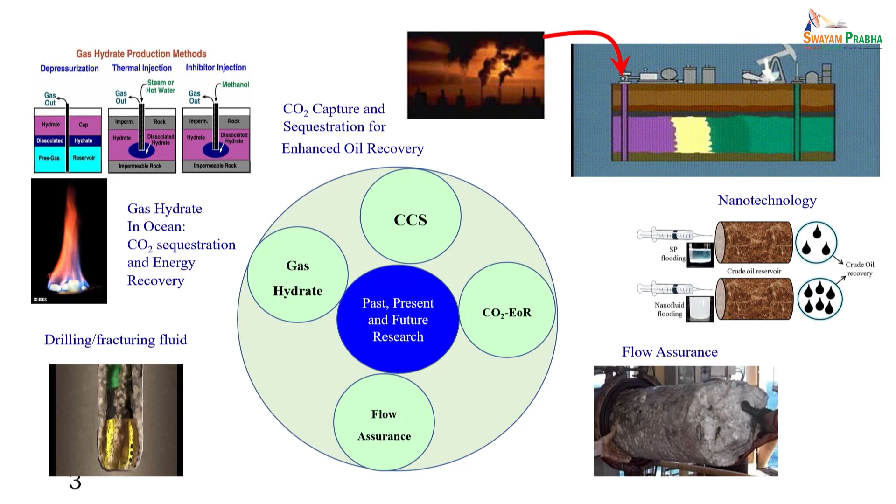Today's talk is primarily focused on properties of carbon dioxide, and then mainly on the capture side, CO2 capture and transportation. There will be talks given by various other faculties which will cover utilization, catalysis, maybe conversion, electrochemistry, etc. So we will have to figure it out, you have to connect the dots, right?

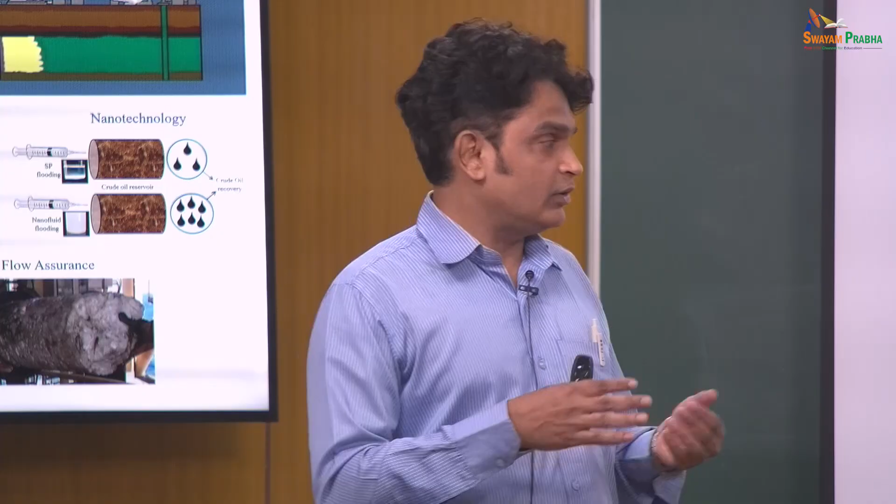So anyway, she has already discussed about these climate issues and how the temperature is increasing. We have been closely around 420 ppm or so, and we have been releasing about 36 gigatons of carbon dioxide into the atmosphere every year, and it is increasing day by day. Why is it important? Even if you talk about 420 ppm, the question is whether it really matters. It's like out of 1 million balls, we have 420 balls. So do I really worry about it?

It is indeed. There have been certain lab scale experiments showing that small amounts of CO2 can be responsible for generating or increasing the temperature. If you make sure all the conditions mimic the atmosphere, the temperature will rise. For example, if I sit in a car, close the door, and come back after a while, you can feel that the car is hot, you cannot really stay inside. This is a greenhouse gas effect, so we have to really worry about it.

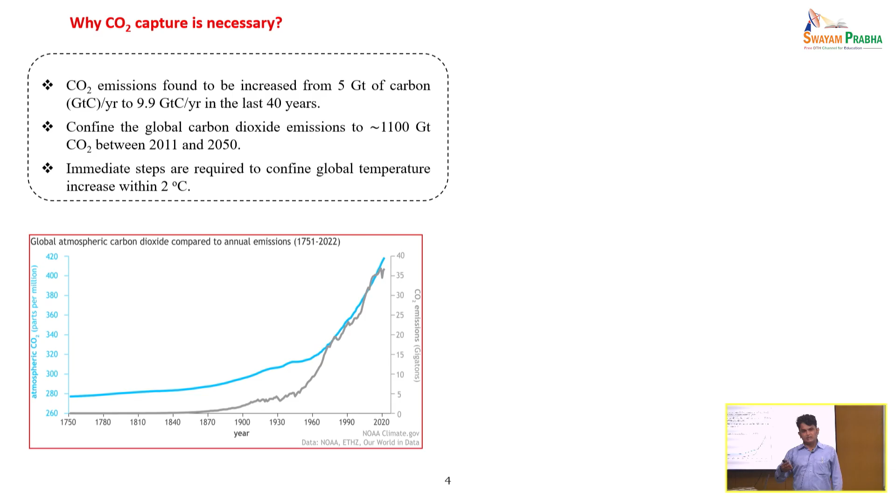And of course, if you look at the data over past several years, there is a rise in temperature. It is of course because of CO2, and there are various other factors too, but one factor is carbon dioxide emission, right?

Now how can we go for net zero? Of course renewables is something we have to consider. But can we really go for renewables? Can we really take care of all our energy requirements from wind, solar, or so? No, it's not possible, because today about 82% of our energy mix is coming from fossil fuels all over the world. Looking at growing economies like India and China, we are primarily dependent upon fossil fuel, including coal, oil, and gas.

If you go out of the campus, you will find several thousands of cars and automobiles running, including two-wheelers, and all use oil, petrol. If there is a bandh or strike by petrol pumps, I think there will be a mess in the city, all prices will go up. So energy is very important for our living. If you do not get oil, there will be an energy crisis. And if there is an energy crisis, then there will be a food crisis. So all this is connected.

Nowadays, it's not that we get only locally made food available, we cannot survive on one thing. So energy is very important for our living, and our energy requirement is increasing day by day.

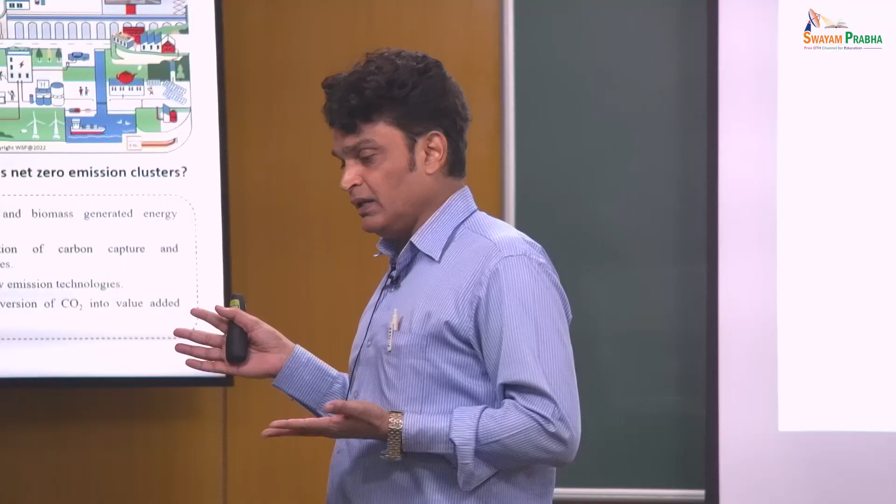I joined in 2010 in the IIT Madras campus, and I saw that there were very few cars, even as an assistant professor when I joined, I did not have a car. I got one in 2021 or 22. I was happy riding my cycle.

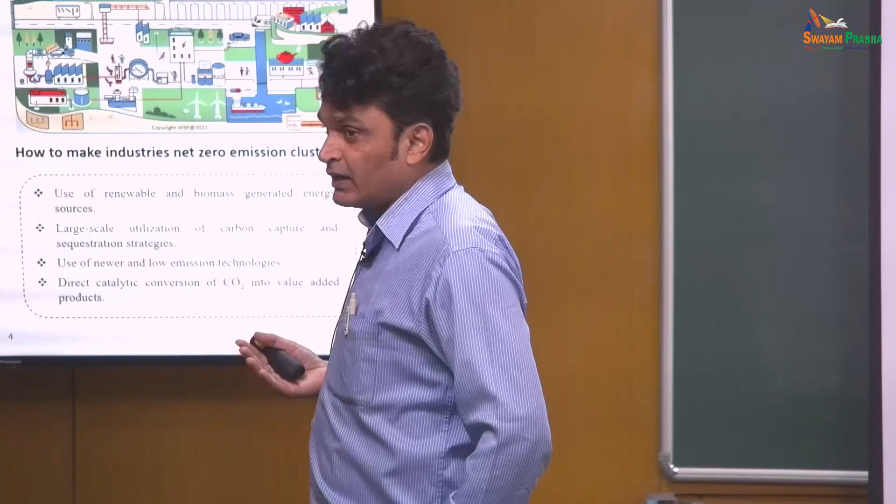It's okay, I am living on a campus, why should I need a car? My children were studying in Kendriya Vidyalaya, going on two-wheelers, so I did not have a car, to be honest. It is not that I was not able to buy it. But today, any assistant professor who joins the campus comes with not one car, but two cars, because his wife is also working, he is also working, so both of them have a car. So you can see the difference, right?

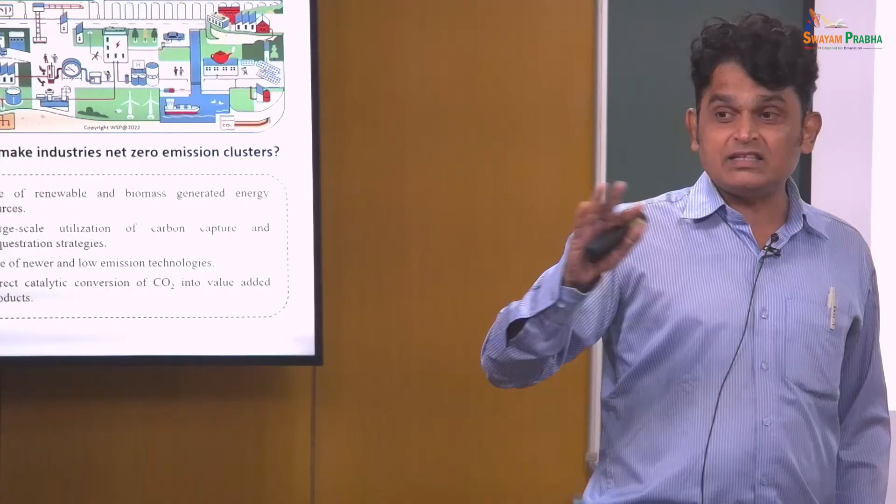All the classrooms are becoming air conditioned, right? That energy is not coming from somewhere, it's coming from electricity, and electricity is ultimately coming from fossil fuel. So we have to understand that our energy requirement is increasing. Just look at everything, a dishwasher, all kinds of electric equipment, and that requires energy. So energy is very important, right?

So in a short time, or at least 3 to 4 decades, I do not see that we are going away from fossil fuels. It's not going to happen like magic, that suddenly after 2 years we will have something completely coming from renewable energies. There have been certain studies which show that even for 50 to 60 years fossil fuel will dominate the energy basket. The international energy agencies say that. Anyway, I am not really going into detail about that.

So what is pollution? We talk about man-made pollution. We have solid land pollution, everybody is aware of this. We have liquid water pollution that affects our rivers and everything, and we have air pollution. These are the 3 major forms of pollution.

Now what is the difference between these? If I go back and see, I can easily segregate solid material from the land. I have plastics, I can segregate that easily, even hand pick that. It's easy for me to separate out from the land. Go with water, the liquid phase, molecules are different. It's slightly challenging for me to separate dyes from the water. So I need a membrane, RO, reverse osmosis, and all kinds of chemical processes that require additional energy.

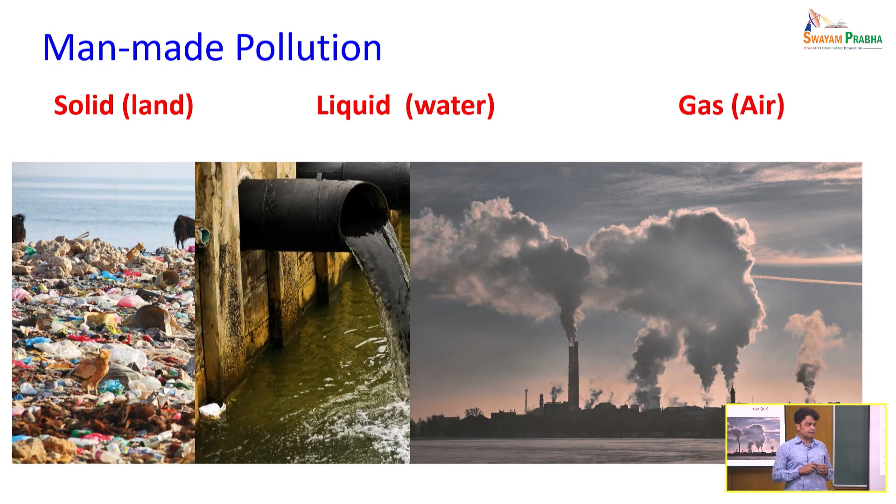Before, right? So you segregate it before you release it into the atmosphere. That is the more challenging aspect of air pollution that we talk about. Of course, air pollution involves particulate matter and many other things that I am not really going into detail about. But as far as CO2 is concerned, we have to ensure that technologies are developed so that before it goes into the atmosphere, we capture it and dump it somewhere.

Now, this CO2 emission is increasing, and as I said, the majority of this energy consumption is responsible, like transportation, energy used in buildings, other industries, etc. And of course, there is agriculture, forestry, and other industries. So energy is a major sector that results in pollution of CO2, carbon dioxide.

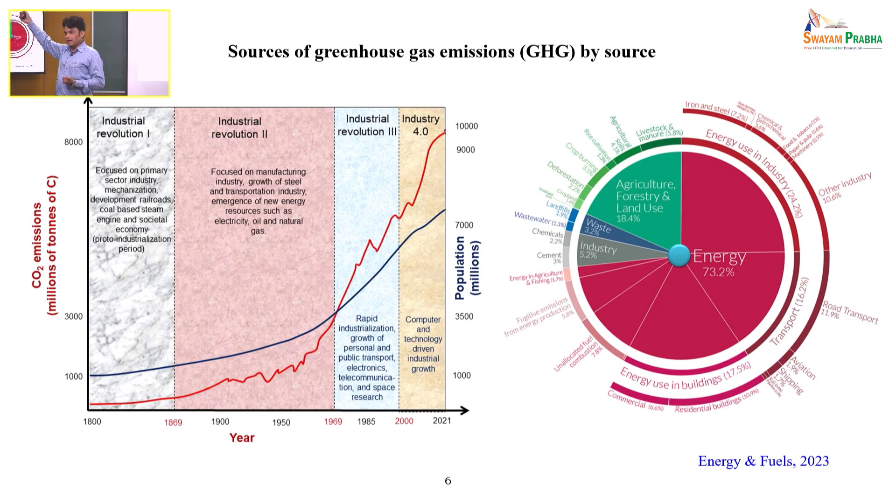Anything, you have a flyover that you can see being built everywhere, right? Ultimately, that results in pollution, because you have to generate cement, steel, and everything. You have cranes running there, everything. So to generate cement, you require a lot of energy, you release CO2, etc. Even generating steel that is required there. So every man-made activity ultimately has a CO2 footprint.

Even the chair that you are sitting in is not net non-CO2 free, right? It has generated a certain amount of CO2 into the atmosphere. So why am I telling you this? We are talking about today a $3 trillion economy. The Prime Minister says we have to go to $10 trillion, $5 trillion, and so on. Every country wants that. Can that happen while saying I am not going to emit CO2 and still have a $10 trillion economy? It's not possible. There have been certain correlations of CO2 emission with economics rather than population.

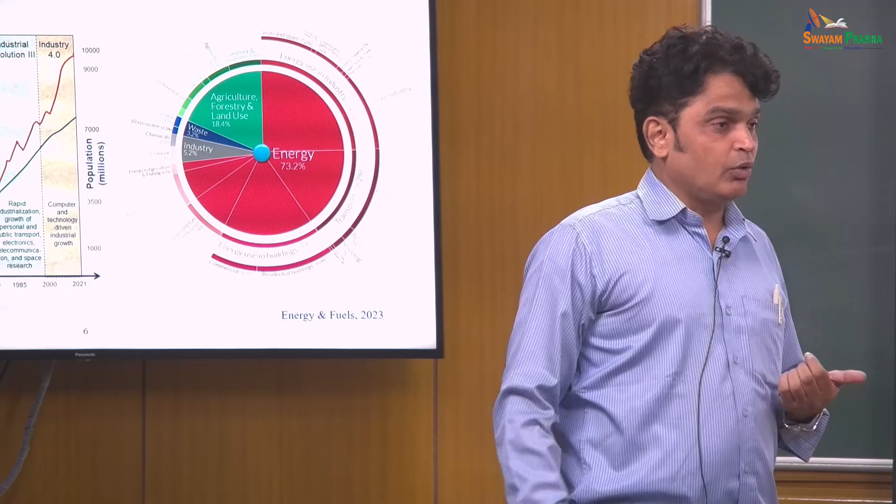The more you want your economy to be higher, you become more of a consumer. You consume and throw, right? So sustainability is an important aspect of this whole game. Anyway, going forward, now the global temperature is rising. I think Madam had already covered that.

Land to global land to ocean temperature anomaly, and it is over somewhere about 1970s, 80s. It is beyond that; it is increasing.

Now there are various scenarios that show, if I capture carbon dioxide, if you do not capture carbon dioxide, how the annual mean global temperature will rise in the next few years. There are certain models - I think Madam will cover that in detail, so I am not going to spend more time on that. But you have to understand that we have to predict the future 20, 30, 40 years down the line in both energy, environment and earth.

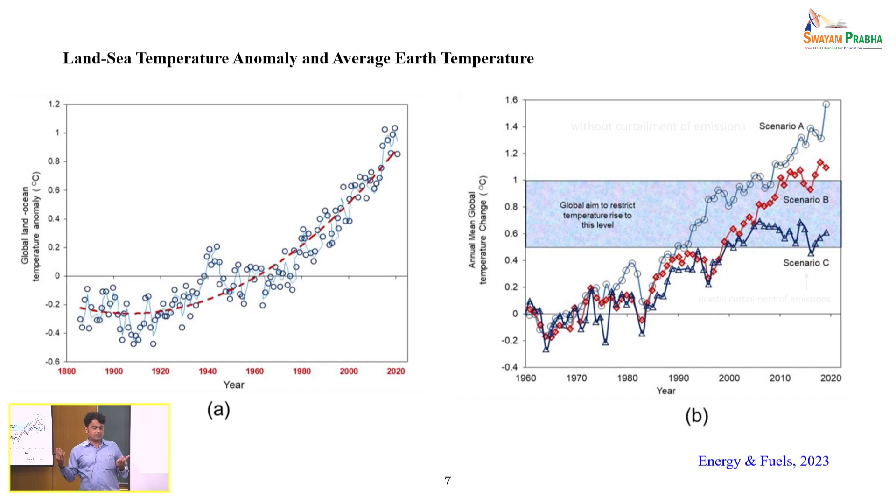If you look at the name of my lab at IIT Madras, I have written 3E lab. It talks about earth, energy and environment. It is a nexus. I cannot say that I do not want energy, but I want less CO2. The more you want energy, you are going to release CO2 into the atmosphere. So you have to dump that into the earth, or you have to take care of your environment. So all these 3 E's are important when you look at overall climate change. All this nexus has to be understood.

So this is an example of coal. In the 1970s, 50s, 40s, you might have seen the steam based transportation through trains. British used to have trains. And then because of pollution, they stopped that - I am not going to run the train because it generates a lot of pollution, I should run it on electricity. Now most of the trains are actually running on electricity.

And this is the data that shows, somewhere from 1950 onwards, the use of coal in transportation has decreased. It's almost negligible now, in 1990s and beyond. I do not see coal.

Earlier, when I was a child, I could go into the market and buy coal. Coal was even used in households for cooking purpose. Kerosene was used in households too. But today if I go into the market, I will not get coal easily. I have to find out, somebody will say you go here and there. Getting coal is not easy right now in the general market.

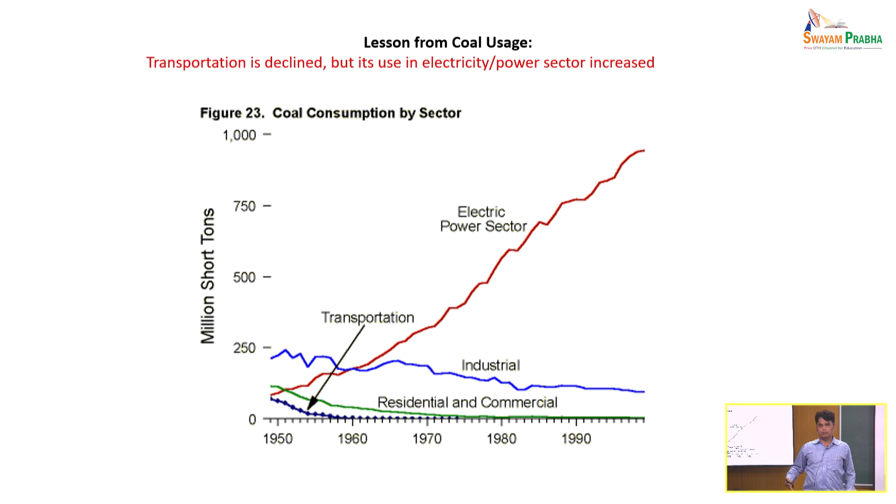But look at coal use in electricity generation - it has increased. So when we cannot see something, does it mean that we are going away from coal? No. Today also, as Madam said, Germany wants to again restart their coal fired power plants. I was reading a couple of weeks back, New Zealand also wants to import fossil fuels. So they have realized that it's not a quick decision to say that I am not going to use fossil fuels.

So even electric vehicles - I am a little critical about electric vehicles, not because they are not clean, of course they are clean, but they only look clean. If you go back and look at the calculations, you will find that they are more difficult for the environment, because we are not improving the electricity requirement - where will the electricity come from? If we really want to generate all electricity from solar energy, then that's fine, but I am not seeing that happen anytime soon.

Even to generate silicon solar cells, there are calculations in the literature which show that they also generate CO2. So nothing is CO2 free, net neutral. Less than 1% of vehicles on the road are electric vehicles - there are about 15 million or so electric vehicles, less than 1% right now.

But given the fact that, okay, I am happy with electric vehicles, does it mean that from this I am going to go away from fossil fuel? I require more energy. Anyway, going forward, let's talk about CO2 in the atmosphere.

Nature has its own way to address the CO2 concern. It has said, okay, whatever CO2 is being emitted, I will capture that. So almost 50% of CO2, it has been said that nature takes care of it on its own, it absorbs it. But because we are growing our economy and burning more fossil fuels, the net CO2 that is going into the atmosphere is increasing gradually every year, and it is getting accumulated.

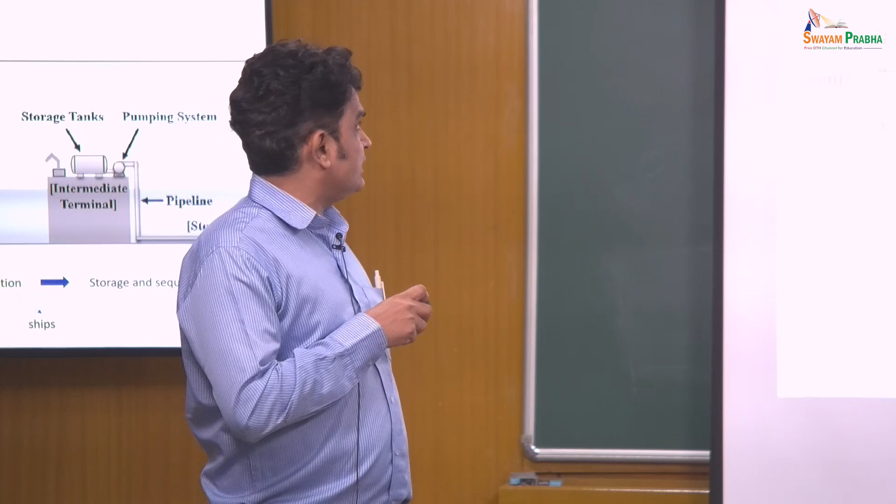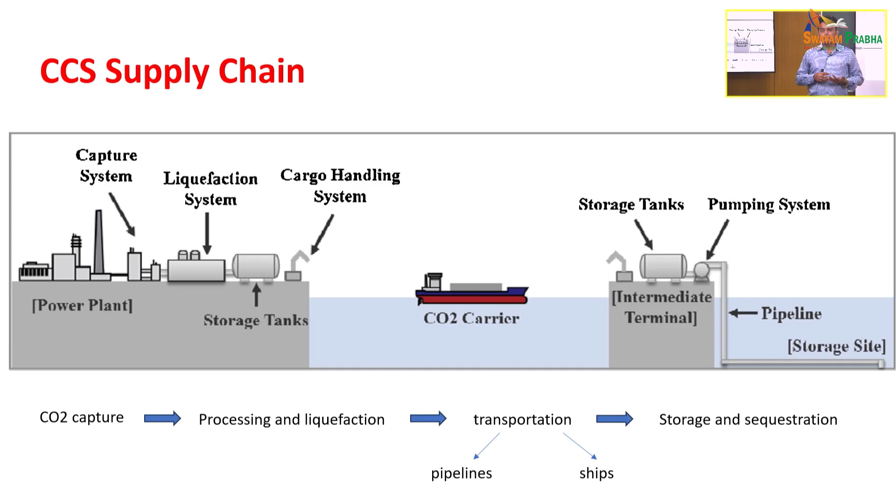transportation and sequestration, and utilization, where you convert CO2 into a value added product like methanol, ethanol, or dimethyl ether. What kind of product can you convert CO2 into? Urea, carbonates, methanol, right? If you understand, most of these conversion processes still require energy. The raw material required, for example methanol or other stuff, requires some kind of hydrogen molecule.

Where will the hydrogen come from? Today 99% of our hydrogen comes from fossil fuel, less than 1% comes from the so-called green way - less than 1%. This is from the International Energy Agency report for 2021. So conversion is still a long way to go.

Utilization, unless I could get hydrogen from biomass or from splitting water through solar energy, which is again very tricky. Of course there are technologies available, but these are not something that can be looked at at large scale. I cannot generate and say I have all hydrogen coming from solar power plants by splitting water. I can do that experiment in the lab, but it's still a long way to go.

So what is a quick way to act? I am not criticizing any technology here - I am saying I do not have time, I want some quick decision. So the quick decision is that I have to dump it somewhere - dump it in sea or onshore. No, I will tell you it's not that simple, but it's at least more favorable in ocean or onshore. Scientifically it is proven. Anyway, we will discuss that.

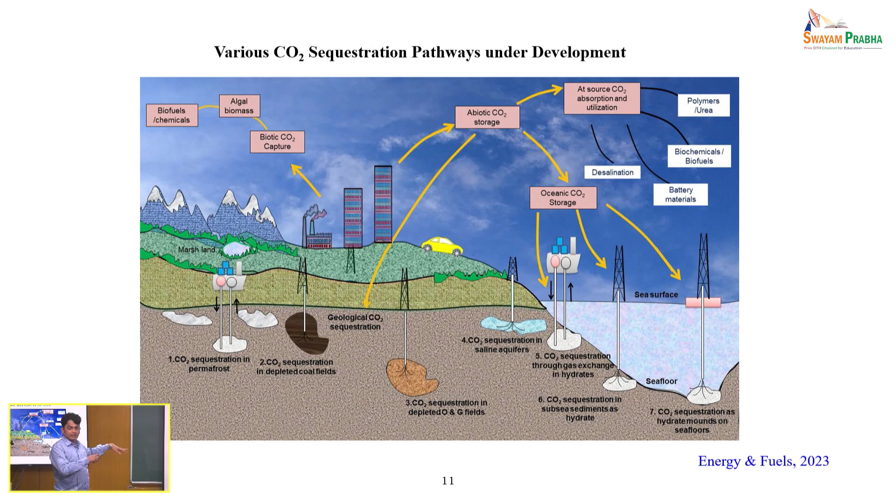The other potential region is the sea floor, where you can sequester CO2 in the form of solid hydrates or below the seabed - I will discuss that in one of the next classes, not the focus of today's discussion. Madam will partly cover aquifers, EOR, etc. We have worked on that, but I think Madam will be best to discuss all these details. Anyway, so this is the ocean storage.

In the ocean you can sequester in different ways. You can do a CO2 plume sinking. You can have disposal of CO2 in the form of carbonates, because CO2 can convert into carbonates. You can actually have CO2 liquid pools in offshore conditions - liquid pools, CO2 will form liquid conditions in those conditions.

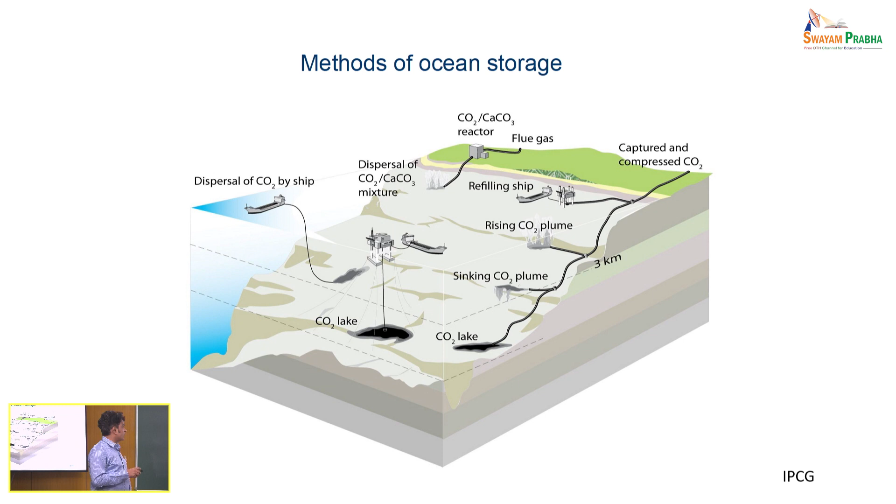I will discuss that in detail in next class when I teach that - how CO2 can form a liquid in the ocean and why it is safe. Anyway, so this is the general CO2 storage mechanism: you have flue gas, a CO2/CaCO3 reactor, captured carbon dioxide compressed, and then you can transport that through pipeline, ships, risers, etc.

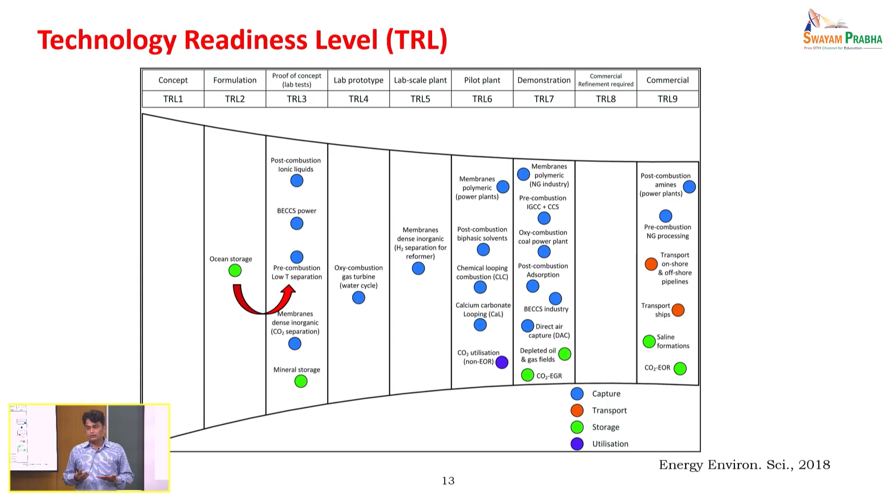Anyway, so why this major focus on CO2 capture? Because anything you want to segregate from air or flue gas, you have to capture carbon dioxide first. So there is one way to capture CO2 from flue gas, or another way is to capture CO2 from air. As I said, about 420 ppm, very small amount, very difficult - I do not know where the CO2 is lying here in the room. Challenging task. That is called direct air capture, DAC.

People are also looking at direct air capture technologies. There are plants available commercially, but they are still not really being looked at in a major expansion. But slowly it is expanding because government has to do that.

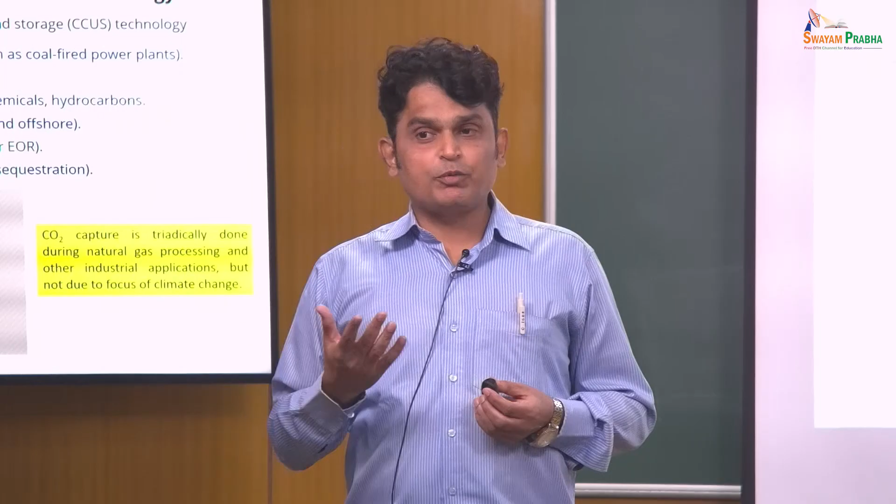Now this is a junk that we produce - it is not something where you have to see that I am segregating my waste and I am not generating anything out of it. I have to pay still to the corporation - I pay some money, they charge me a tax or something like that. So we pay for segregation. Similarly, as a human being, in order to ensure that we are actually in a safe environment, we have to pay for that - there will be a penalty that comes in terms of money.

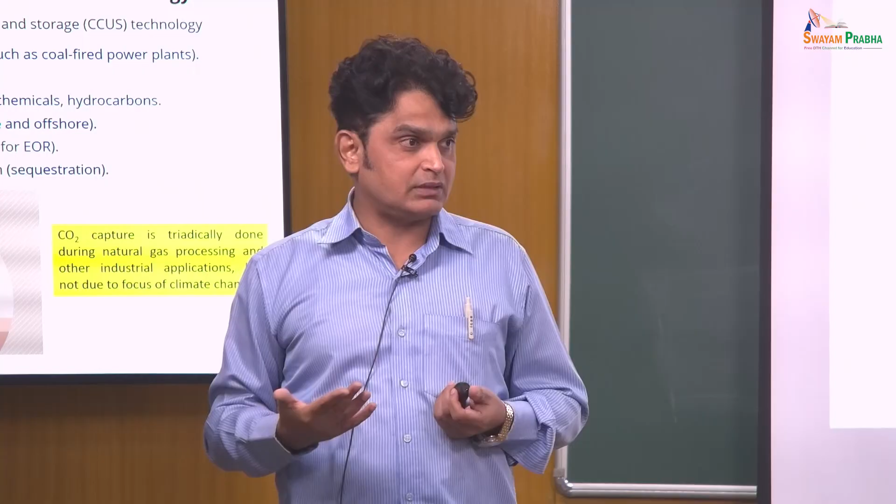Technologies are looking at how to reduce this cost of capture, transportation, and sequestration. So in the last few years, that cost has also slightly come down, looking at development in technologies.

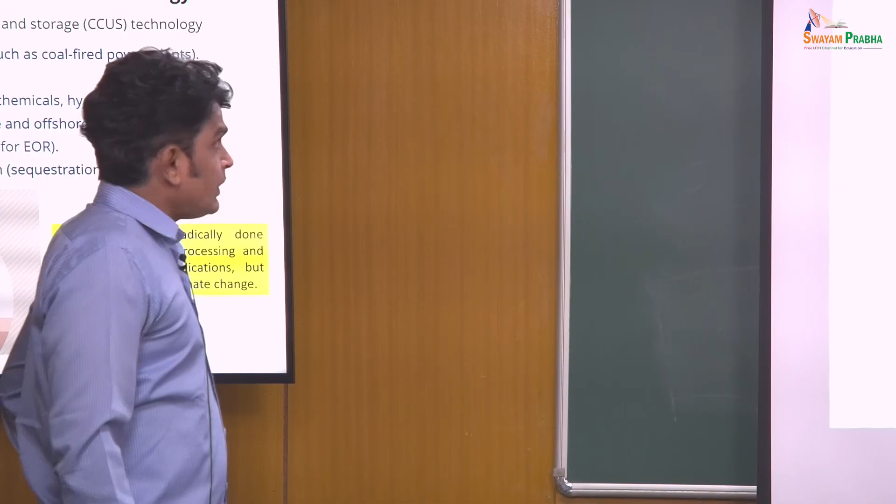So we'll discuss a little bit of the cost aspects. Now CO2 capture, either looking at a stationary plant or point of source like a coal fired power plant, or you can do that from direct air capture. You can convert that CO2 as a feedstock for petrochemicals and hydrocarbons. Again, challenging, as I said, it takes time.

You have to transport that from the power source to the storage sites, either onshore or offshore by pipelines, and you have to inject that into the underground for enhanced oil recovery or depleted oil and gas fields, etc., or you can do that in the ocean.

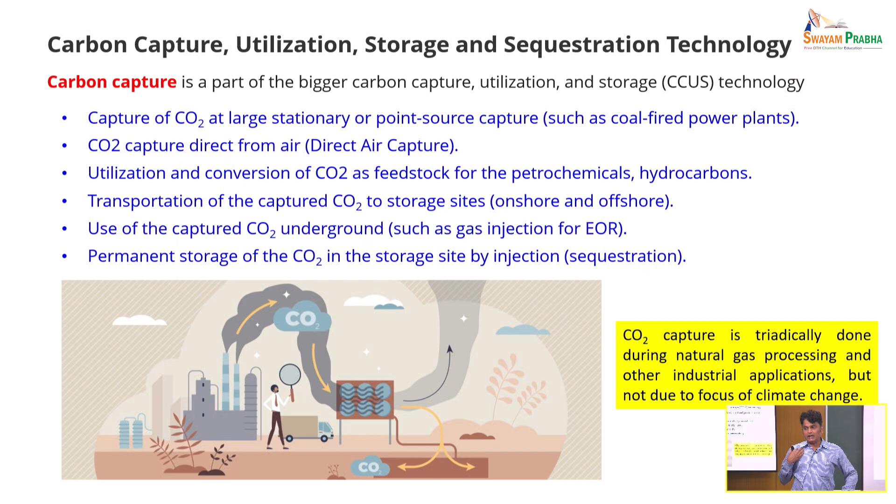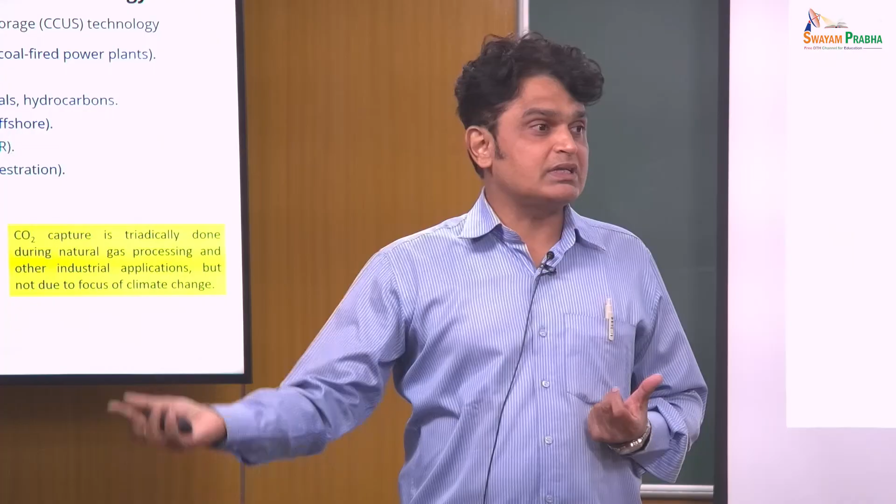CO2 capture is traditionally done in natural gas processing and other industrial applications. It's been there earlier, it's not something that started recently. The natural gas industry has been doing it for a long time, but they were not focused on climate issues. So the technologies were available for specific applications. Now similar technologies are being expanded, and new technologies are also coming up to take care of CO2 from flue gases, power plants and other industrial activities where CO2 can be captured and stored.

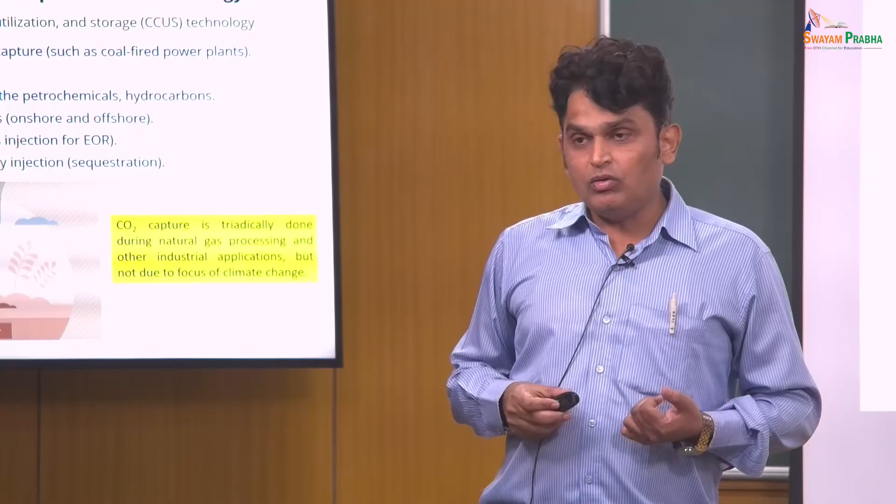Now this requires significant strategic decisions. Why? Because one has to understand that you require to develop CCS corridors where I can capture CO2, transfer that to the pipeline, sequester it into the formations, or use it in industrial applications. So CCS corridors have to be developed by different countries so that this overall process can be made very efficient.

So anyway, what is important about carbon dioxide? Now if you look at this carbon dioxide phase diagram, everybody understands the phase diagram, simple stuff. Carbon dioxide remains gas in this zone, this is a liquid, and this is a supercritical fluid. The temperature is about 300 degrees Kelvin, which is the critical temperature, and about 100 bar, which is about 1500 psi or 100 atmosphere, or 10 megapascal, which is the critical pressure for carbon dioxide. Any pressure above 1000 psi, any temperature above that, it becomes supercritical.

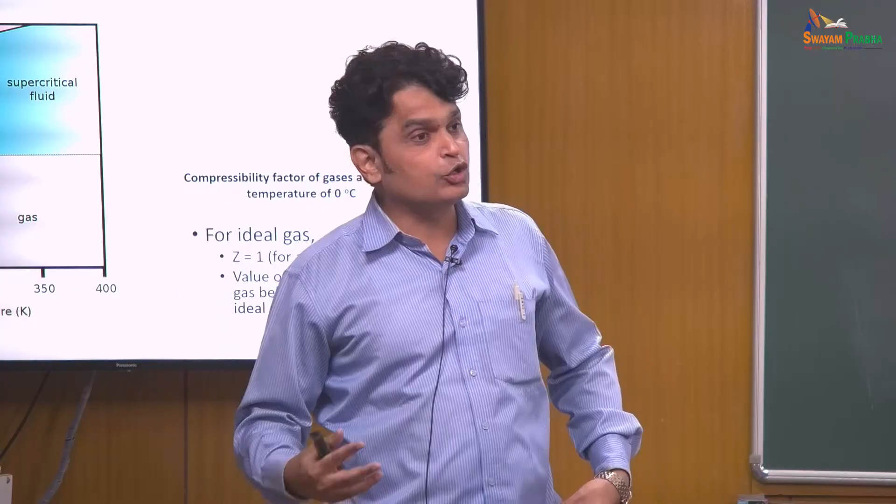Why is it important? Because we should talk about onshore underground storage. Most of the temperature in the reservoir falls in this zone. So CO2, once it goes into the reservoir underground onshore, it becomes supercritical. Supercritical CO2 has different properties, it's not the same property as a gas, so you have to understand that aspect. Supercritical CO2 will have interaction with different reservoirs like sandstone, shale, etc., or basalt formations.

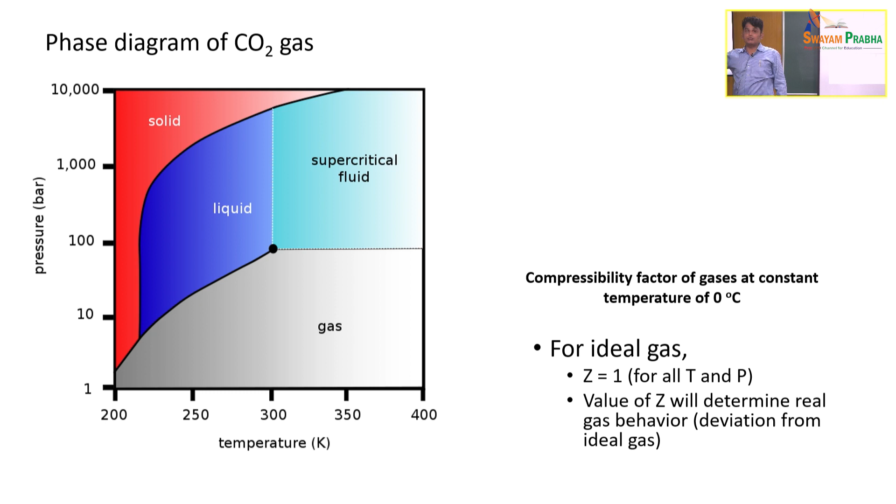If you look at CO2 into the ocean, if I want to inject that into the ocean, the CO2 at certain depth will become a liquid. Ocean temperature is somewhere about this condition, close to 4 degrees centigrade, and the pressure beyond a certain point, 5 megapascal and beyond, it becomes a liquid. So if I want to dump CO2 into the ocean, it becomes liquid at those conditions. Anyway, we will discuss that in detail later on. But this is a very important figure which tells you the different properties of phases like gas, liquid and supercritical fluid as far as CO2 is concerned.

Now everybody knows that any gas is ideal at normal temperature and pressure condition, Z is equal to 1. But as far as CO2 in the atmosphere is concerned, I do not have to worry about it. But when I want to transfer that through a pipeline, either onshore or offshore, the pressure and temperature conditions will not be atmospheric, they will change, and therefore CO2 will not be an ideal gas, it will become a real gas.

Hydrogen, all of them actually have a Z of 1 at normal pressure and temperature conditions, but as pressure increases, the value of Z differs for individual gases. For hydrogen, Z always becomes more than 1 as pressure increases beyond atmospheric condition, and therefore hydrogen storage is still a challenging task because of this property. The amount of volume required to store hydrogen increases as you increase the pressure, so it has not become economical as far as hydrogen storage is concerned. Hydrogen has a molecular weight of 2, a very small molecule.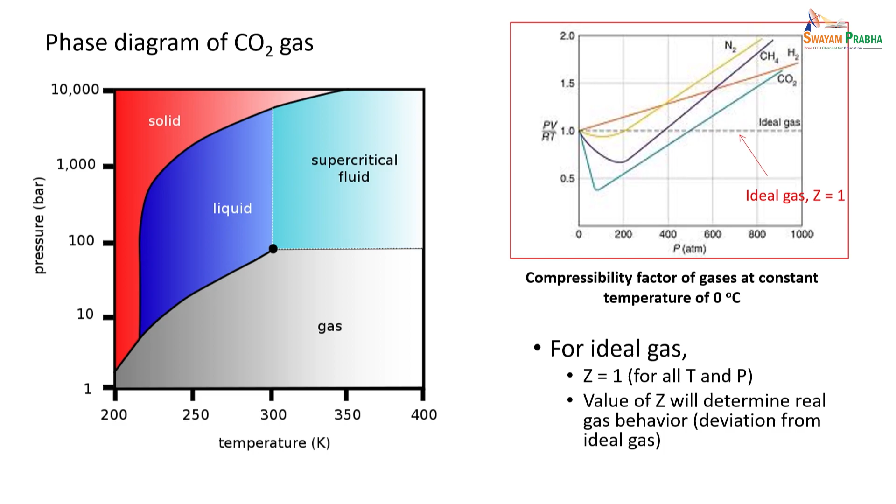That also gives me an idea that Z is very important to define storage and transportation facilities by ships. For example, I will tell in one of the slides that CO2 is transported at about minus 30 degrees centigrade in liquid form. So what is the pressure required in that condition?

It can be low pressure, so I can have a container. LNG, liquefied natural gas, is transported at about minus 170 degrees centigrade at atmospheric condition, because methane becomes liquid at that condition. Similarly, CO2 becomes liquid at minus 30 degrees centigrade at atmospheric condition, so they transport it that way. It has been found that CO2 transportation by ships is more reasonable at those conditions. So some of these properties of CO2 are very vital to understand.

Now look at this flue gas composition. This is exactly the flue gas composition from SEPCO, one power plant near Chennai, which has a coal based power plant. Look at the amount of various components in the flue gas - you have ash, moisture, oxygen, nitrogen, argon, SO2 that goes out of the chimney, sulfur trioxide which is negligible, and carbon dioxide is 18%.

18%. Now one chimney, you can see how much it is. One chimney per hour emits how much? This is actual data from one power plant. Can you tell me how much ton is that? 3000 ton, close to 3000 ton per hour.

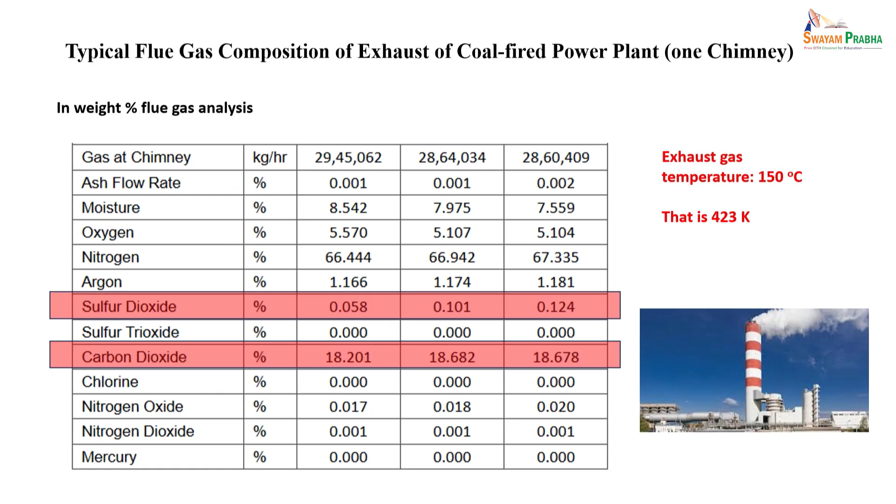Alright, so this is a situation. Now when I say the carbon dioxide property that I have discussed, the carbon dioxide is not a single molecule available in the atmosphere or even in the flue gas. It is available along with different other components of gaseous state. So therefore the properties will change, properties like density, viscosity, and so on. So you require equation of state models. You must have studied that, equation of state models like Peng-Robinson, SRK, Redlich-Kwong, and so on. So to use those equation of state models to understand the properties of flue gas, you want to transfer and design your operations to separate carbon dioxide from the flue gas. Everybody is with me, right?

Now, what are these important aspects of flue gas generation in the power plant? As I said, energy is important, so we cannot stop going away right now from the coal-fired power plant. So typically we have a power plant that has to be connected with CO2 capture systems, like is shown here schematically.

You can have a CO2 scrubber, SO2 scrubber, as I said, that you have to separate out. Ensure that you require different types of material because it is not easy to handle SO2, sulfur dioxide. You have a flue gas that goes into the absorber where you can have different systems like amine systems. You can separate CO2, capture that. You can have a stripper unit and then you can separate the pure CO2, and then the CO2 can go into sequestration or transportation. Are you getting my point? So this is a typical schematic of how the combustion and associated CO2 capture process looks like.

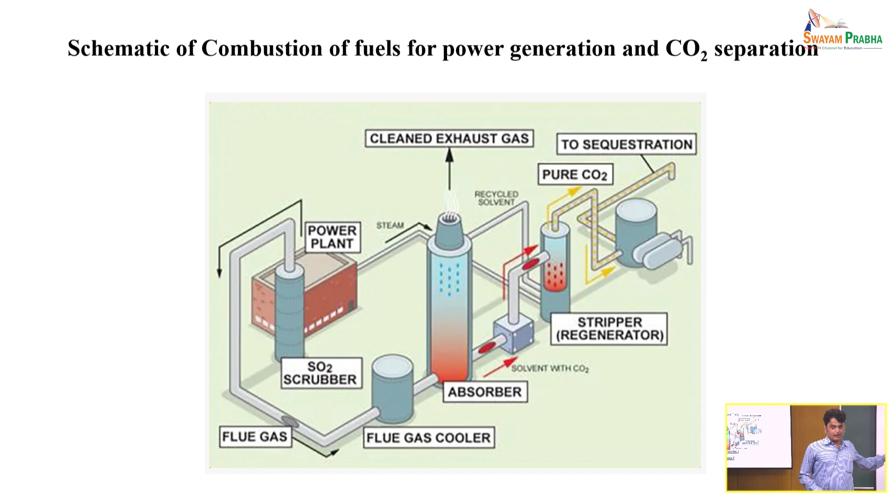Let me come, right? Now there are 3 major types of combustion. Either you can do a pre-combustion capture of CO2, or you can do a post-combustion capture of CO2, right? You can capture carbon dioxide before you generate it into the atmosphere.

So you can have a pre-combustion process where fuel can convert into a gaseous mixture of hydrogen and carbon dioxide. Partially you oxidize that - you oxidize coal in oxygen and air and then you generate a synthetic gas, syngas. The synthetic gas can further be converted into richer hydrogen and carbon dioxide. The advantage of that is that you are actually capturing carbon dioxide which has a reasonably higher concentration of CO2, so that it becomes easier to capture CO2. As I said, when you have less amount of CO2, it becomes very challenging to capture. When you have heavier or more amount of CO2, then you can have a better chance of capturing it. And then hydrogen can go into power generation, electricity generation, and then you can actually capture that CO2 and store it. So here the CO2 in the mixture can range from 15 to 50%.

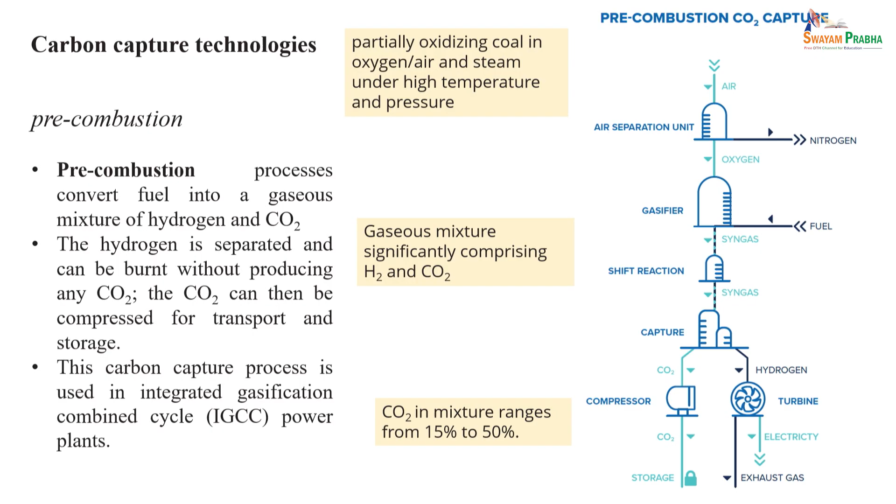This requires an integrated gasification combined cycle power plant. These are less available - people are reluctant to do that unless, because this doesn't really add any value to them technically or economically. So unless they get some money, they do that or they don't do that, right. So this is a money game primarily. What really makes them economical, that's the question.

Now the other method is post-combustion capture. These pre-combustion systems are limitations, as I said. So they have high efficiency and relatively easier carbon removal from fossil fuel. The advantage is that the hydrogen rich stream can convert into electricity efficiently. However, the overall capital cost of the gasification process exceeds the conventional pulverized coal fire power plant, and that's discouraging their adaptability.

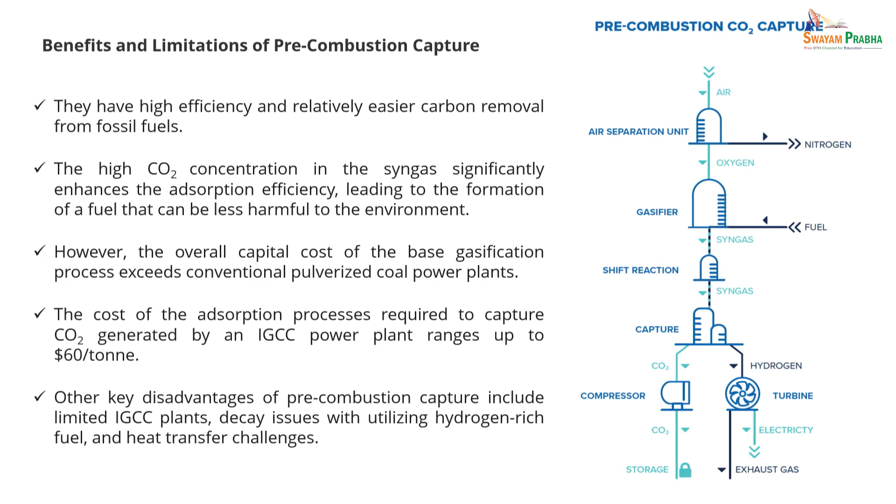The cost of the adsorption process required to capture CO2 generated by IGCC power plant can range up to $60 per ton, which is still not very attractive to the companies, right. The other disadvantage of pre-combustion capture includes limited IGCC plants, decay issues with utilizing hydrogen rich fuel, and heat transfer challenges. So some of these challenges are there. Again, as I said, hydrogen handling is again a very challenging task, right. So this has safety issues and so on. So this is still at a stage where more research has to be done.

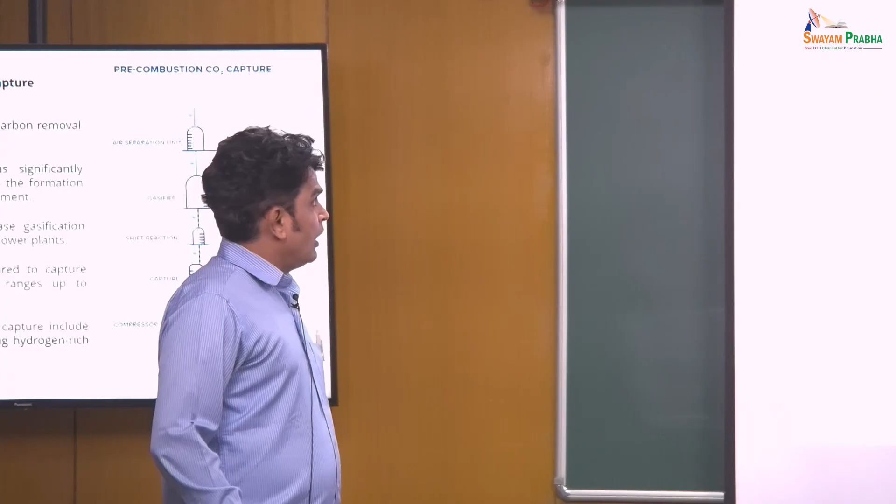Post combustion capture is something people are looking at attractively right now because you combust fuel and then capture CO2. Technologies are available ready-made since you can use conventional technologies to capture carbon dioxide. The challenge is that the CO2 concentration is very low in the stream, sometimes less than 20%, 7 to 14%, and as low as 4% in a gas power plant. So it's challenging to compress, but reasonably easy compared to pre-combustion capture.

This is what a post-combustion capture schematic looks like. You generate a fuel, burn it, have exhaust gas that goes into the system, you get electricity, and then you capture carbon dioxide and store it or transport it for subsequent processing.

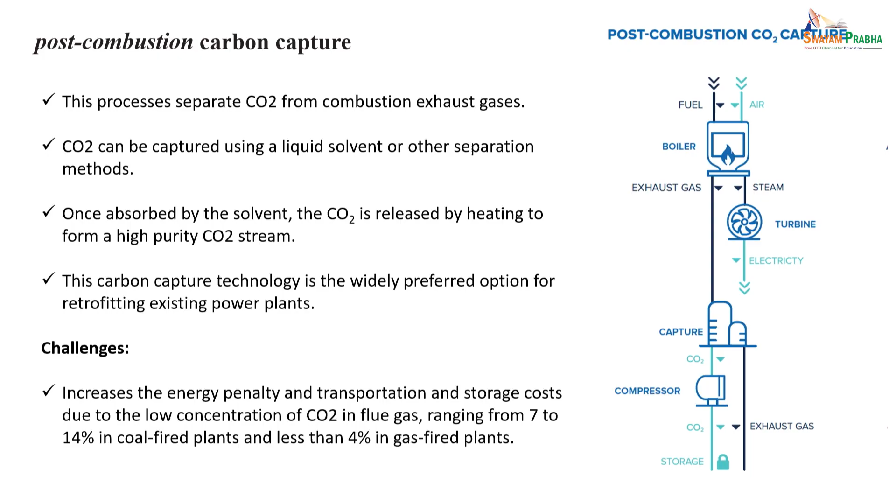Something very attractive is oxy-fuel combustion capture, a more promising technology that people are looking at. Oxy-fuel combustion uses a pure oxygen stream instead of air to burn the fuel, so that you generate more CO2 which is rich in concentration.

It becomes easy to separate or capture that CO2, or it's possible you may not necessarily need to capture it, because even with 50-70% or more CO2 concentration, you can use that directly for underground storage, transferring it right into the storage site. This way you can address the capture part less costly by using a pure oxygen stream to burn the fuel.

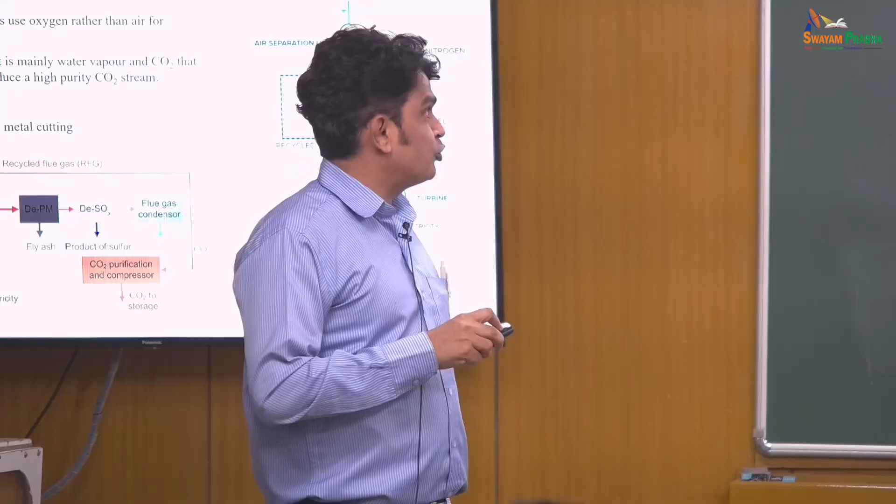This is a schematic showing an air separation unit where you generate more oxygen. During COVID time, oxygenators were used similarly - you get oxygen from air by separating it in a small unit.

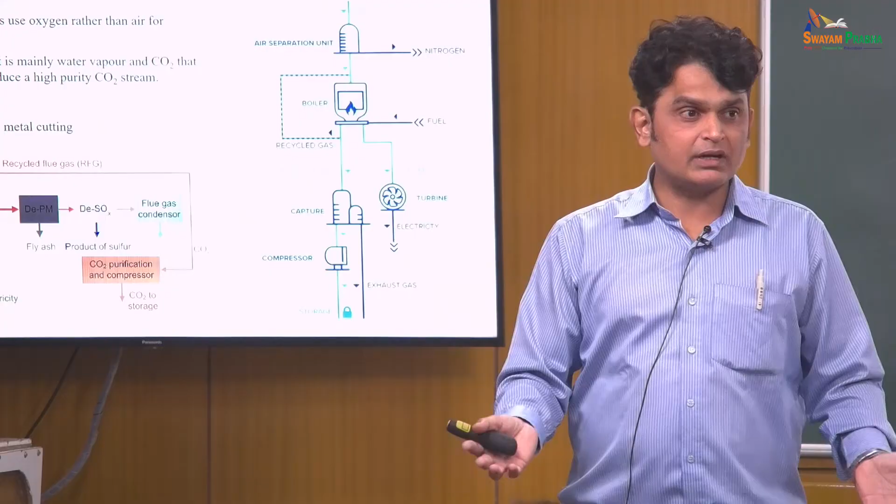You can separate oxygen from air and use the purer oxygen in the boiler. Because you have mostly oxygen, complete combustion is expected, so you get more CO2 in the exhaust gas, which becomes easy to capture. Then you transport that to the storage site, and of course you get electricity out of it. This is the schematic of what I've described.

You can also have sulfur come out, so you can capture the sulfur as well. It's reasonably easy to capture CO2 from this stream. This has primarily been used in steel making and metal cutting industry, but recently it's also shown an advantage of high flame temperature because you're using better quality oxygen, which can increase the efficiency of the power plant.

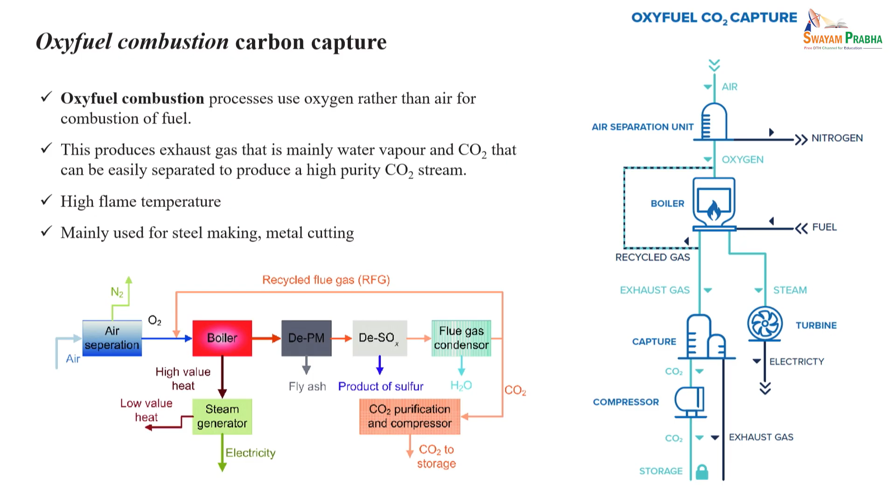There may also be challenges with heat losses because of the higher flame temperature, so heat losses have to be curtailed. That's oxy-fuel carbon capture - it's still challenging. We have to look at the cost-benefit analysis, since all the decisions will depend upon cost factors.

What I'm trying to say is that this is a promising way. As a technologist or scientist, I feel this is a very attractive proposition. Now, how costs can come down, whether we can have better technology to separate oxygen from air - that's what we have to look at. This is ultimately a cost game; anything we put into a plant, cost will play a role.

So this is the overall scenario - we have post combustion, pre combustion, oxy fuel, and certain industrial processes where you generate oxygen, have a separation unit, a CO2 separation unit, and then compress and dehydrate that. This is the capture part of it, and there's a whole lot of technology that goes into it.

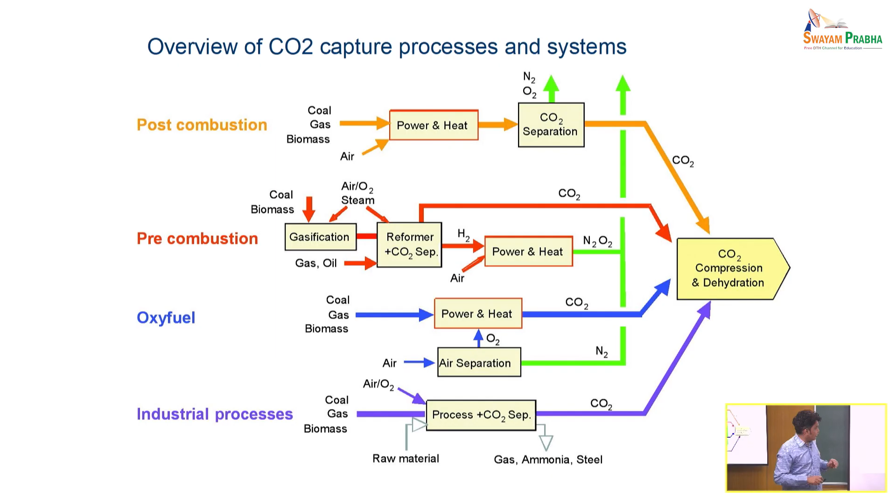As a chemical engineer, we have absorption, adsorption, etc. - all these concepts go into separating CO2 from flue gases. This is CO2 capture traditionally done in the oil and gas industry. As I said, natural gas reservoirs often produce carbon dioxide, so amines were often used to separate it in oil and gas, and widely accepted as solvents in other industries too. This is a CO2 separation and C2-plus recovery plant in the Middle East, where they separate out sour gas, meaning CO2 and H2S.

You can also have a dehydration unit where you separate out water, and then you have a product gas, and you can actually have CO2 and H2S that might go into the atmosphere. They may not really worry about it, because that is not enough CO2 that can be transported, so they may release it into the atmosphere, or they may sequester it into the subsurface reservoir.

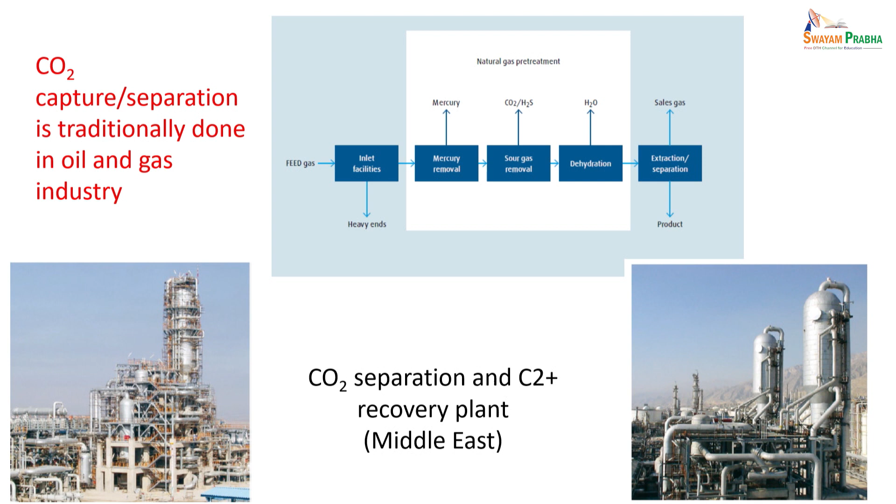So these are something that is being practiced in the industry. It's not something that is new.

So the major solvent-based system, and in the next couple of weeks you will hear about different technologies, people may talk about adsorption, etc. I will just briefly tell you that amines are still being utilized widely as a solvent system, because they have a better efficiency to capture carbon dioxide. It can go up to beyond 80% in certain cases.

Your set of amines, you can have monoethanolamine, diethanolamine, methyl diethanolamine (MDEA), and they have a concentration of lean solutions, and this is a typical guideline for when each can be used. So depending upon the case-to-case basis, their selection will decide which will give me a better solution.

So conventional equations tell us that you can actually convert and capture CO2 in amine carbamates. You can also capture H2S gas from, say, natural gas systems. You can have amine sulfides, and then you have a typical schematic where you have an amine absorber and a stripper.

Absorption takes place at relatively 40 degrees centigrade. You strip it at say about 100 or more than 100 degrees centigrade, so you separate the carbon dioxide from this stripper and then take it away.

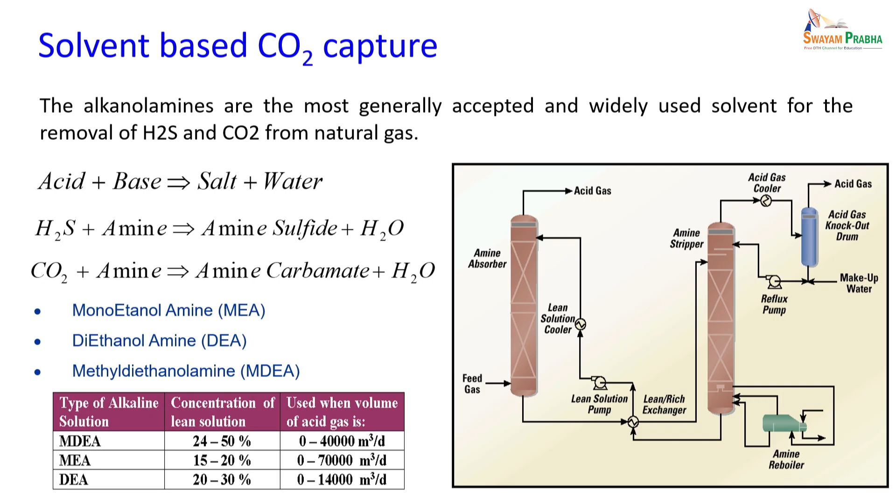Design aspects can be looked at, such as how much size of absorption and desorption columns are required based on the amount of flue gas that you can handle. Simple chemical engineering principles go in, equilibrium constants and equilibrium ratios, and the number of plates or packing height that may be required. So all these simple calculations can be done here.

Now there are power plants available, there are CO2 capture plants available. It's not that this started recently, but very little effort was done before.

In 2009, this is in Alabama, a power company plant in Barry, which was one of the largest at the time, based on a coal-fired power plant. Here CO2 was captured using amine solvent technology, and this is transported to a geological storage site. About 114 kilotons of CO2 was captured, transported, stored, and monitored through the pilot project.

So this work continued and by 2019 efforts made 15 years before had now accelerated. This is Norway's Sleipner project, very famous, and Japan's Tomakomai project. You can see that Norway has started looking at CO2 capture into offshore subsea sediments or saline formations for more than 25 years.

The Sleipner project separates CO2 from natural gas produced at an offshore platform, and the CO2 is then injected and stored into the adjacent offshore formation beneath the sea floor.

And in Japan, the Tomakomai project is a demonstrated project by Japan CCS Company, which was commissioned and recommissioned in 2012, 2018, and 2020, and they have shown that CO2 can be captured and transported for subsurface geological operations.

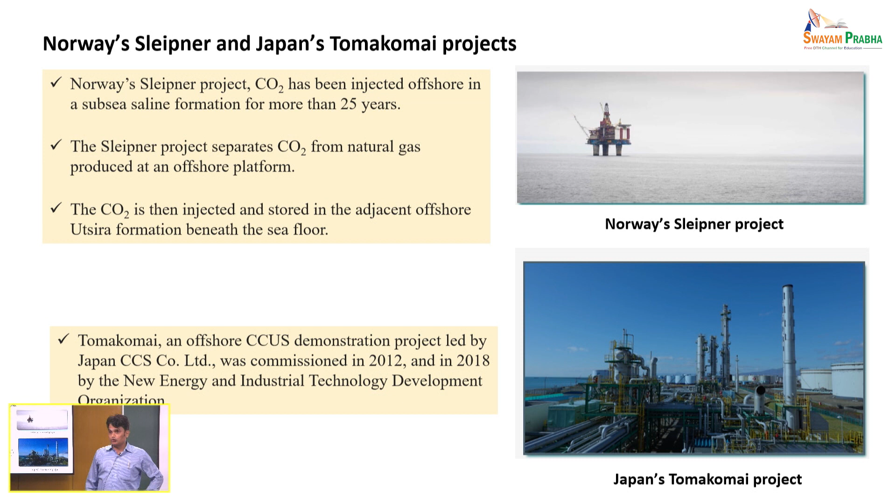So there have been efforts made. I will also show you in one of the next classes additional efforts that have been made at the pilot scale. Now, we are not behind, but we are taking a small step, being an academic institute.

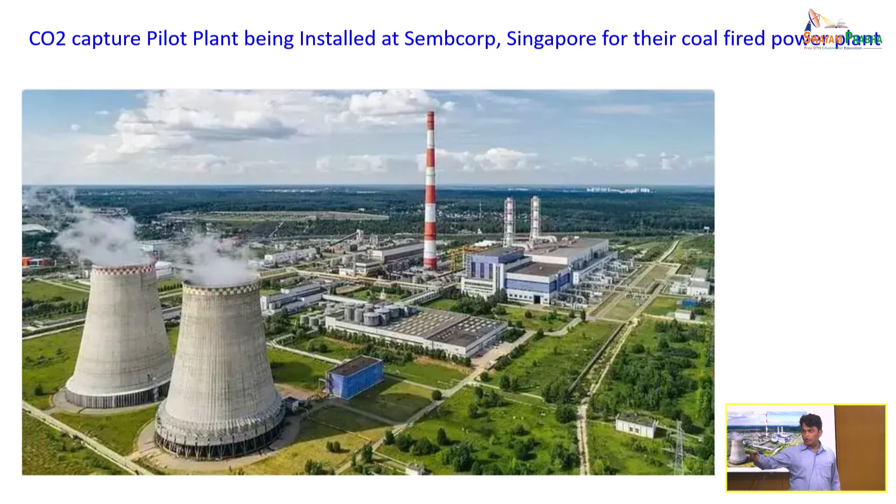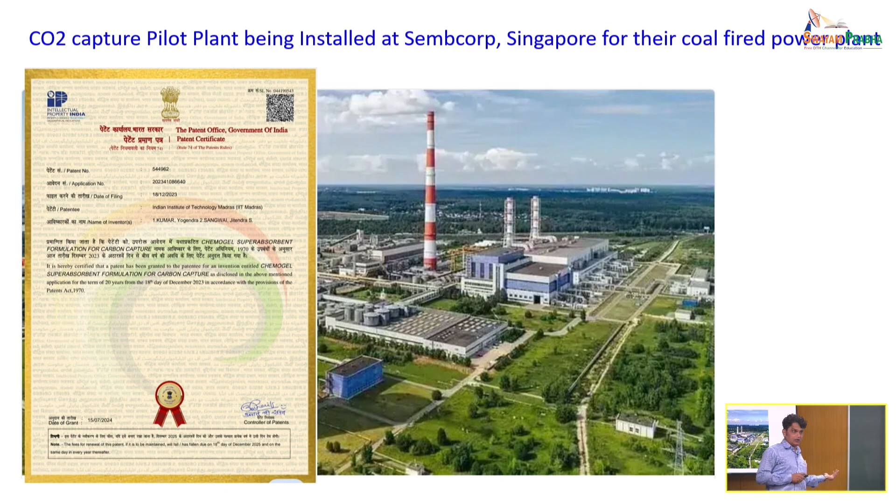Yogendra, sitting next to me, is my PhD scholar. He worked on an amine solvent and improved its efficiency by a certain magnitude. We then filed a patent and got it approved very recently, within 6 months. This is an Indian patent that we got approved, and now a pilot plant is ready for installation.

This pilot plant has been delivered in the field at the power plant in Sembcorp, about 4 hours journey from here. This pilot plant has been developed based on this patent, and we are trying to do some studies there so that we can try to see if the CO2 can be captured efficiently based on the system.

Amines, why have we selected it? Because it is a very proven technology. So I can improve that technology further by one order of magnitude, and then use it for my application. This work is being done, and we will hopefully have results in 1 or 2 months, and once we are done with this, we just have to scale it up.

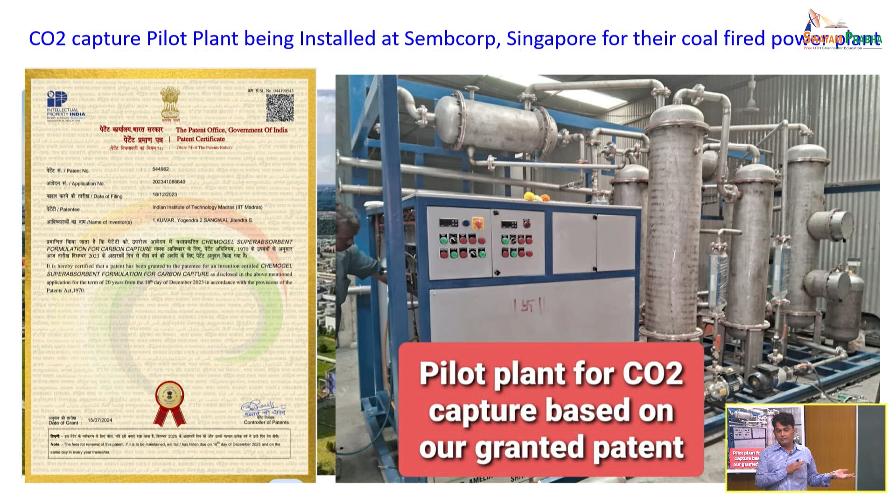I do not have to really reinvent the wheel, I already invented the wheel, I have to just re-multiply it. So we are just waiting for the results outcome, possibly we will see that.

Now transportation and transport process is a very important factor here. It is not something that I capture and forget about, right? I have to store it in a storage tank, then I have to liquefy it. I have to transport that by tankers, by ships, and pipelines to the storage site or even in the industrial application, right?

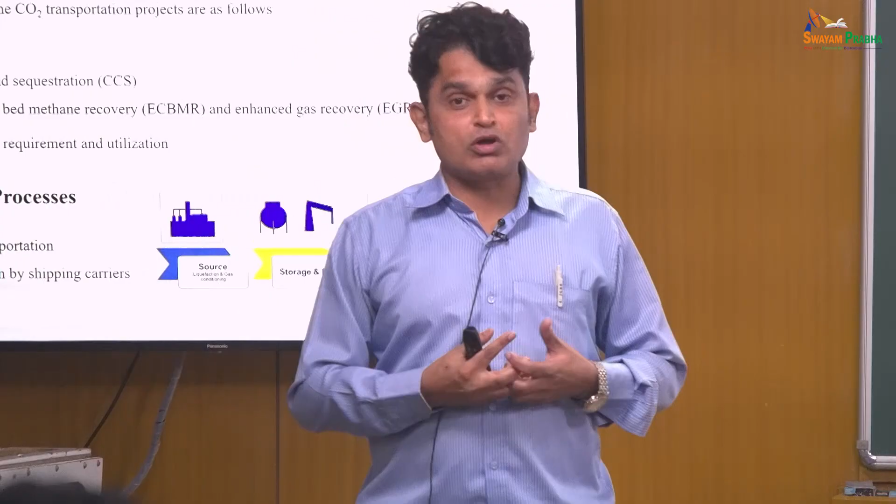So CO2 is not a very easy molecule to handle. Even though it is not flammable, it is highly corrosive to the environment. Any system of metal that you expose to carbon dioxide, which is rich in concentration, will corrode over a period of time. Less concentration I do not have to worry, but if I want to handle a pure carbon dioxide, it is not an easy task. It is highly corrosive system.

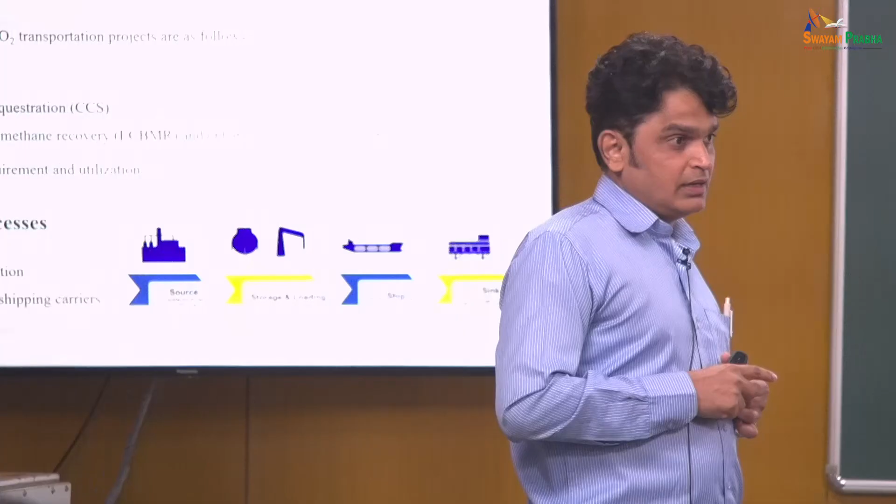Even oil and gas industry is putting a lot of money to develop materials which can address handling of carbon dioxide at certain temperature. CO2 becomes more corrosive at higher temperature and pressure conditions. So this is again a very challenging task, right?

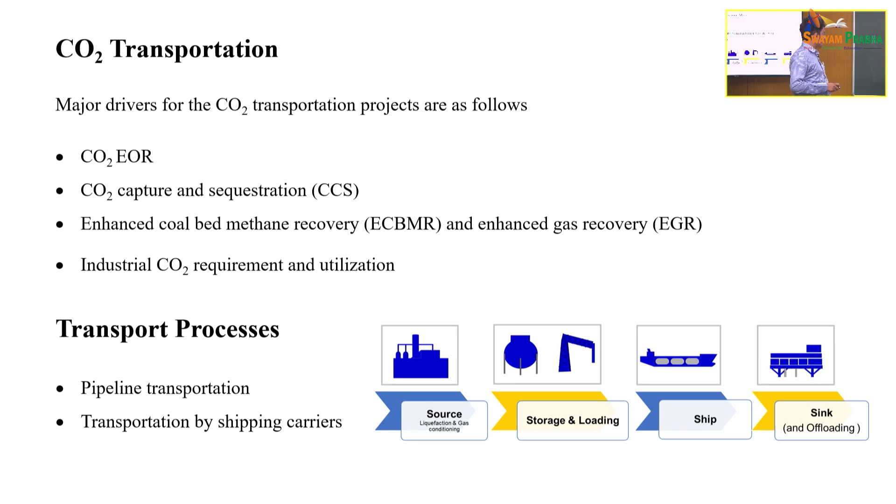So if you look at this transport process, it is required because you have to transfer that to the sequestration site for enhanced oil recovery, for coal bed methane recovery, for offshore or onshore or industrial requirement, right? So this is a total schematic which shows that you have to store and load, and then you have to ship and then sink, right? Pipeline transportation or transportation by shipping carriers, these are something that we have to worry about it.

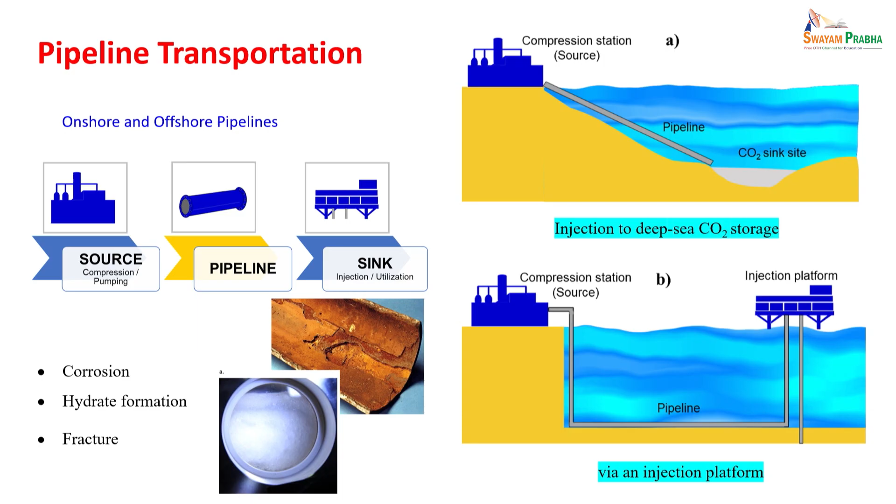However, you have to worry about certain aspects of corrosion, hydrate formation and fracture that may result in metals. So if I want to transfer at low temperature, high pressure, then the metal may not be able to sustain at those conditions, right? So I will tell you, you can see this kind of corrosion. So types of corrosion that can happen due to CO2 and other acid gases.

So everybody knows that CO2, when it comes with water, can form acids. Yeah, pure CO2, but getting a pure CO2 is very challenging. As I said, 100% pure CO2, that's what I am telling you. So even small moisture that goes in, dehydration, storing it - as far as pure CO2 is concerned, you do not have to worry about it. But if it is not completely pure, then it may provide certain amount of corrosion into the systems.

So, but are you able to generate a pure CO2? What is the percentage? Agreed. But in case if you do not have that much pure CO2 process, yeah, of course. Agreed. So my objective here is to tell why pure CO2 is very necessary. If you do not have pure CO2, if you have water vapor - yeah, agreed. But that's what I'm telling you, because when you have pure CO2 available - here pure means maybe without water vapor, without any additional gas stream that may be hazardous to the metal - then you do not have to worry about it.

But if you have moisture along with it, if you do not take care of it, if there is certain kind of contamination happens during the transportation - pipeline, for example, there is a leak, there are valves available, etc - it's possible that something may leak in. So if you do not have that kind of leak-proof system, the other challenge is that if your temperatures are lower, then you may have different types of issues.

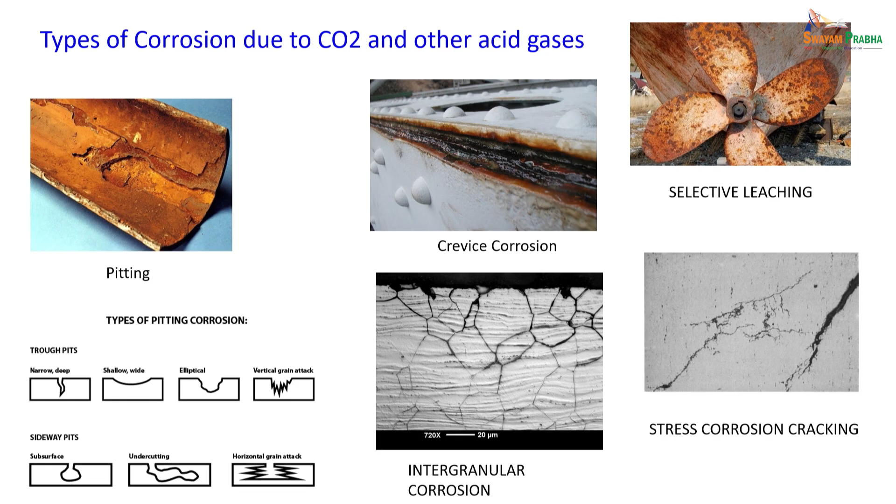CO2 carriers typically have a capacity of about 1000 meter cube, and they can transport at about minus 30 degrees centigrade and about 15 to 20 bar pressure. At low temperature, when you go beyond that, brittleness may affect the metal strength over a period of time. Ship tankers can be categorized as pressurized, semi-pressurized and fully refrigerated, depending upon the temperature and pressure conditions.

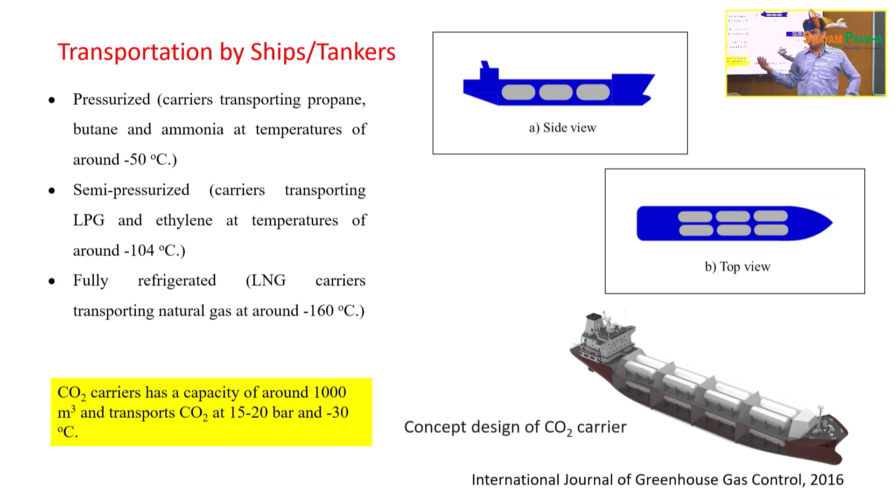This is a schematic design of how the CO2 tankers may look like. You have a top view, a side view, and these are very well contained in ships. Like LNG tankers, similar kind of technology can be adopted to generate such capacities, and we have to see how this CO2 can be transported and stored by pipelines and through ships, etc. So a whole lot of things may be required to understand this schematic.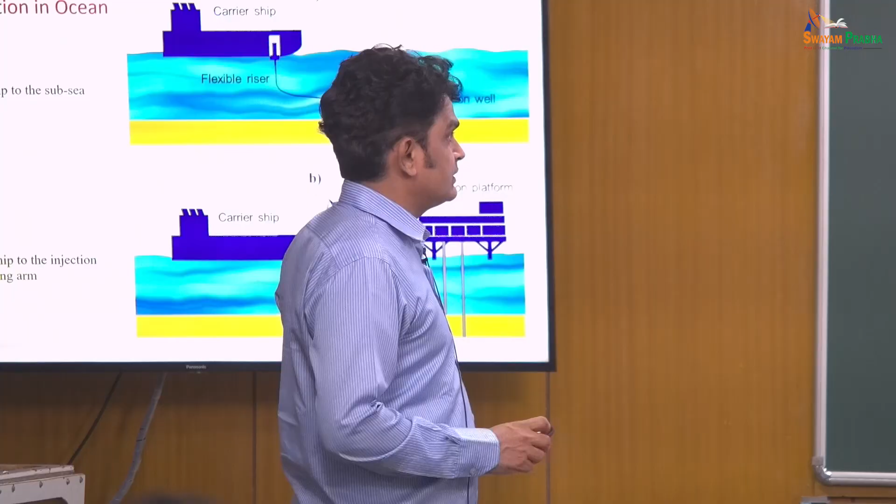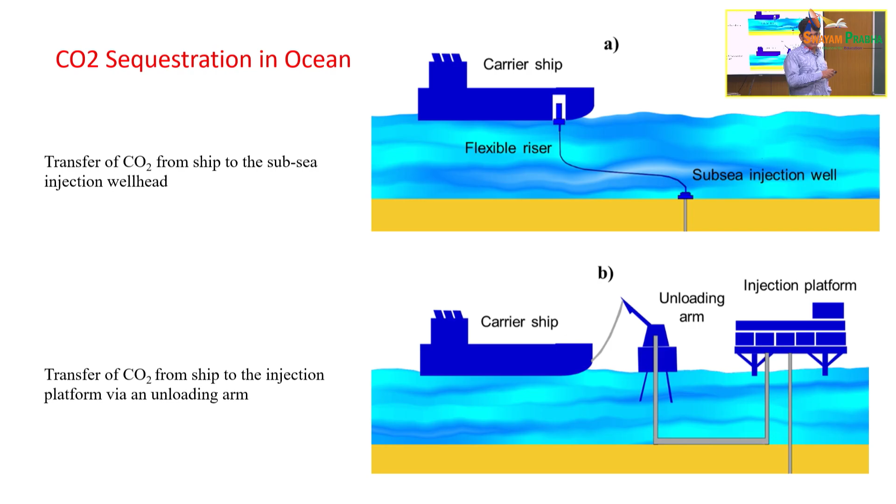Now once you do that, you can inject that into the subsea sediments through a subsea injection well. You can have risers, which the oil and gas industry uses, so you can exploit that for this injection, or you can do that using an unloading arm and existing injection platforms. Schematically it is shown here. So all these possibilities are there.

Now the cost plays an important role. This data is from IPCC, I have just taken it for reference. This is a cost breakup when you talk about ships and the overall process of liquefaction. You can see that the ship accounts for about 30% of cost, liquefaction accounts for about 42% of cost, unloading 16%, storage 9%, and loading something like that. So this is from IPCC data, I do not know exactly how they arrived at it.

Then you can also look at the cost in US dollars per ton of CO2 for a 250 kilometer range, and it shows that onshore provides a lower cost because it is easy to transfer. But as you increase the mass flow rate of CO2 per year, offshore transportation also becomes attractive. Not cheaper than onshore of course, but it shows you need significant transport of CO2. I should not plan an offshore project if I want to transport just 5 metric tons of CO2 per year. I should plan for significant CO2 transportation capacities.

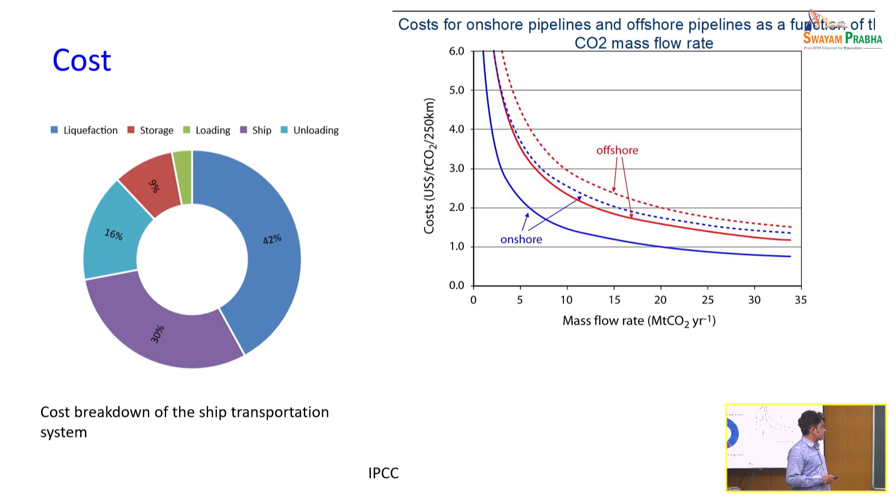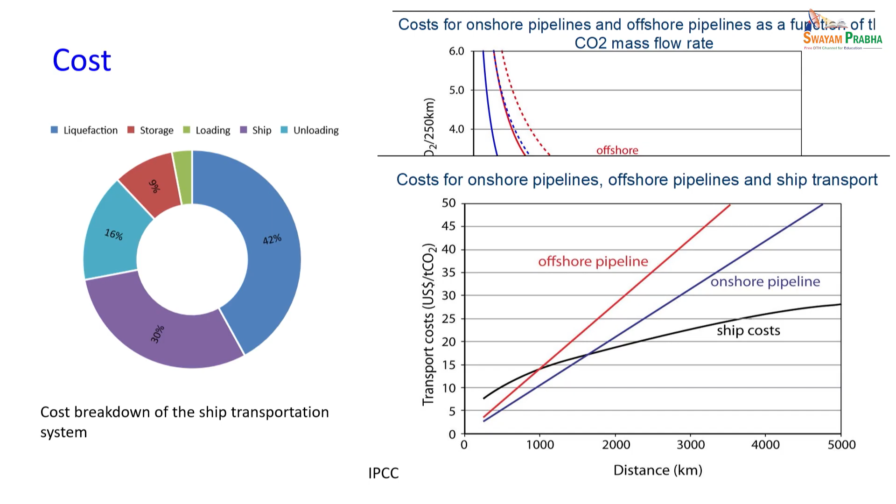This shows the transportation cost in US dollars per ton of CO2 over distance. For less than 1000 kilometers, the ship shows a higher cost, and offshore pipeline cost continues to increase dramatically. Onshore pipeline cost also increases as distance increases, but ship cost reasonably comes down below the onshore and offshore conditions. So it shows that transportation of CO2 by ships for longer distances may be an attractive proposition, based on this. So cost plays an important role.

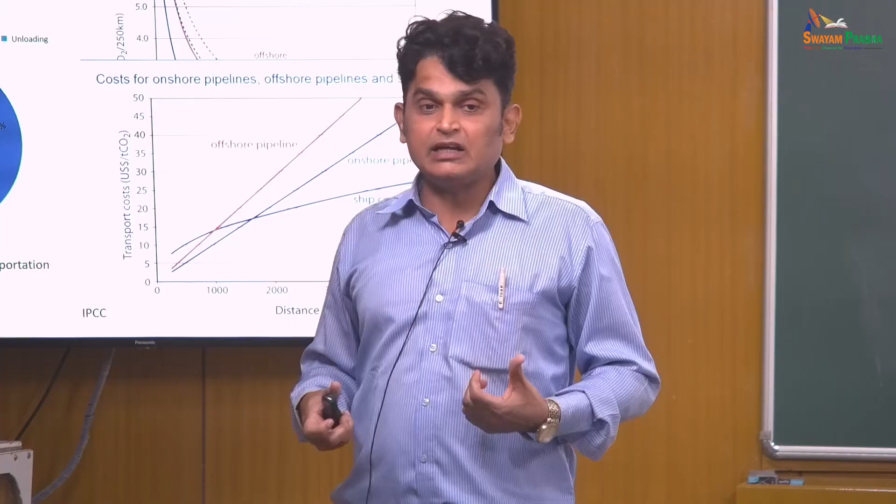As I said, this process requires a penalty in terms of cost, and we have to see what is best that we can do to make sure we do this overall process conveniently. Now, other aspects that madam will certainly discuss in detail: CO2 injection onshore can also be done to recover more oil from the reservoir. Thereby you can actually generate oil and also sequester CO2.

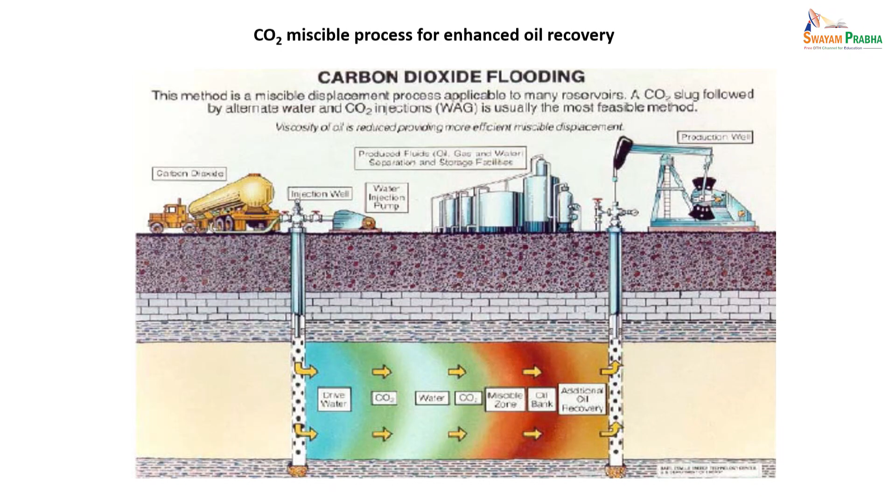So there are different phenomena that govern CO2 sequestration. Mineralization is something that takes a long time, but you have capture by the pore network of CO2 on a short time scale, and over a period of time it gets mineralized. So there is a lifespan of CO2. What happens to the CO2? What is the fate of CO2 that goes into the geological formation? There are certain studies available which indicate that CO2 storage for a long term time span can be more stable in both onshore and offshore conditions. So this gives some idea about CO2 capture, and we will discuss more details about that.